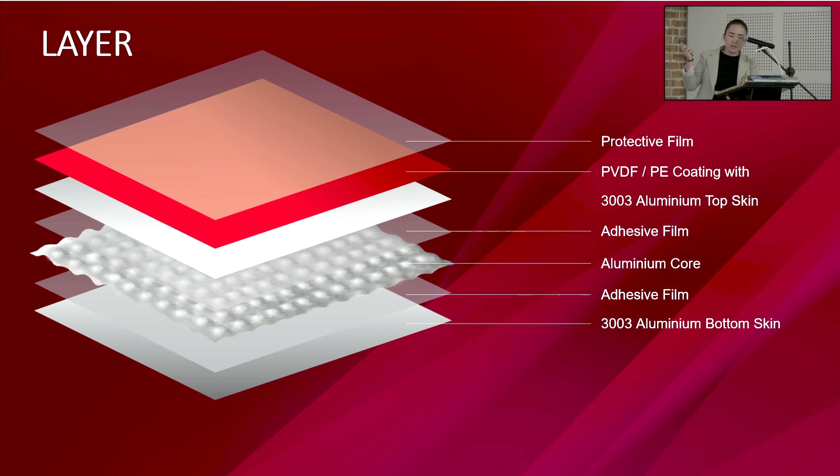Flatlite's total panel thickness is 4mm. Top and bottom aluminum thickness are both at 0.5mm. The finishing can either be PVDF, PE finishing, or powder coat. Panel width is fixed at 4 feet, and the standard length is 8 feet or 16 feet. Apart from the standard length, we can also go for customized length.

Why choose DML aluminum Flatlite? Since Flatlite is fully aluminum, it is non-combustible and fire-resistant material. The second advantage of Flatlite is lightweight - it reduces weight by 30% compared to aluminum composite panel or standard solid panel with equivalent rigidity, making installation quicker and easier.

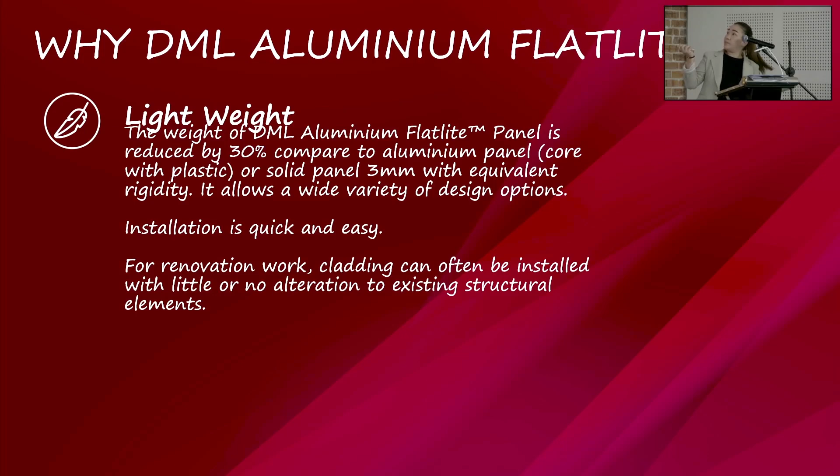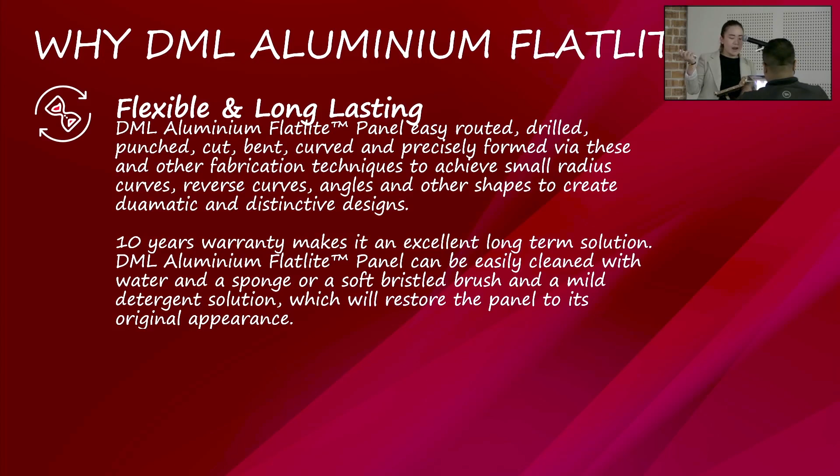Third, flatness and high strength. The Flatlite panel lamination process results in excellent flatness by eliminating small deterioration remaining in the thin aluminum, with durability and rigidity. Fourth, pure strength - Flatlite panel adopts new technology and reaches more critical technical indicators, with pure strength, quality, flatness, and weather resistance improved to the best situation. Fifth, flexible and long-lasting - Flatlite is easy to fabricate to achieve any distinctive design, and it's also easy for maintenance.

Last, easy to process and install. Since Flatlite is lightweight and flexible, it is unnecessary to add on a mass support system. In conclusion, the advantages of Flatlite are: lightweight and low static load, high property strength and good rigidity, sound insulation and heat insulation, waterproofing, UV resistance, recyclability, and high surface smoothness and flatness.

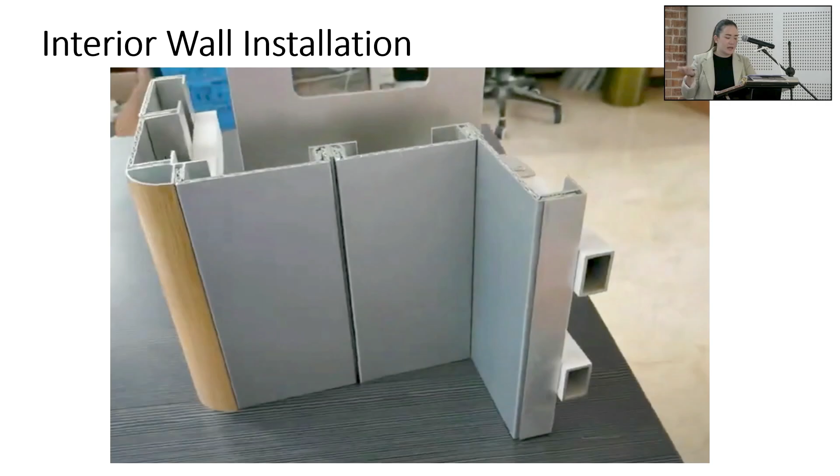This is one of our installation methods. Our aluminum product offers unrivaled flexibility, aesthetic, and safety assurance. We are not just a manufacturer - we are your partner in design and construction, committed to bringing your architectural vision to life while upholding the highest safety standards. We invite you to explore the limitless possibilities our product offers and to engage with us for design guidance and installation expertise. Thank you for your attention, and we look forward to collaborating with you on your future architecture endeavors. Thank you.

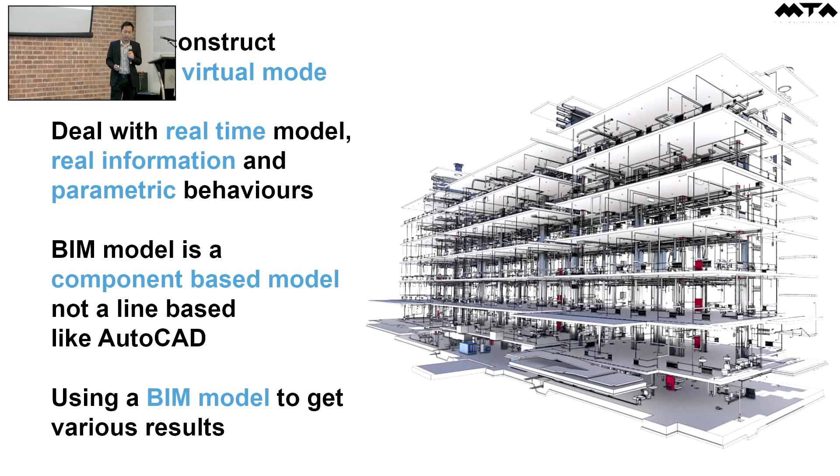It's not line-based like AutoCAD. We have some data inside the models, and we can use BIM models to get various results from concept to construction.

First of all, we need to understand the LOD, level of detail, level of development, where we have LOD 100 until LOD 600. We must understand this first before proceeding into BIM models later.

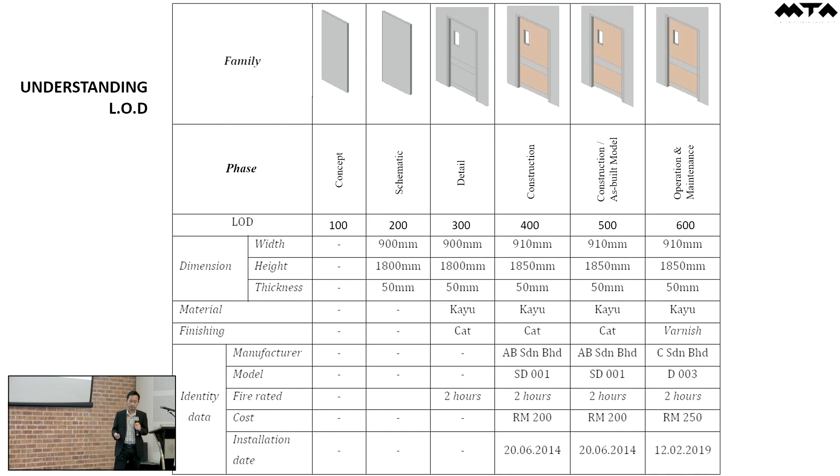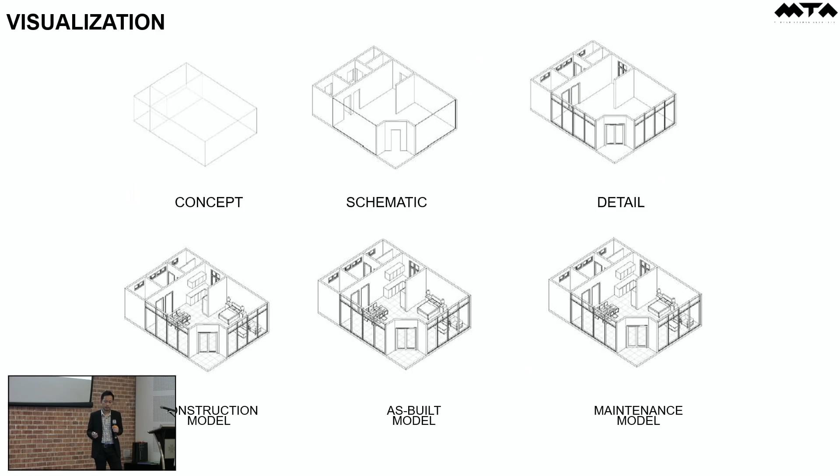I will start with visualization. Before we embark into BIM, we must understand this diagram, which is the concept. We start with blank massing, schematic, then proceed to details, detail into construction models with data, as-built model, and into a maintenance model with a lot of information and data inside the models.

Concept design stage - we can start with massing form from the models, and then we develop into schematic design, where we can get in the early stage of concept, so we can get the square area for initial costings.

In the early stage also, we can get samples of floor area we can get from the massing.

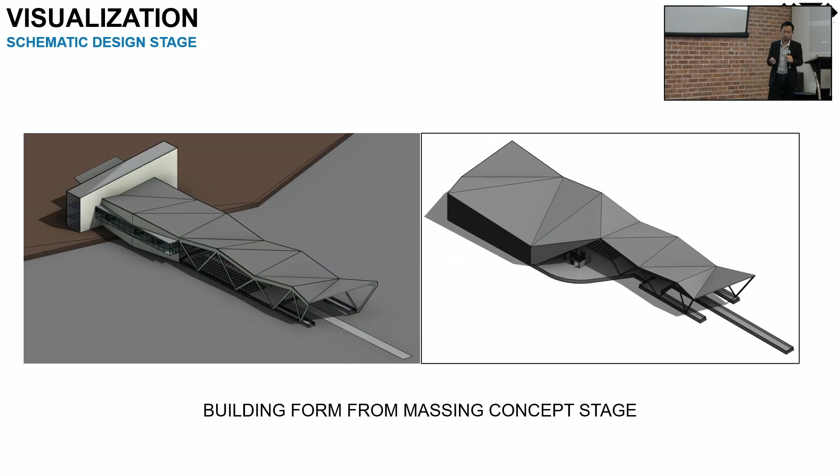So the model helps from the early stage until the later stage. The development of models goes from massing into schematic design, and then we combine architecture and other disciplines, and we can plug our initial schematic design into the real-time site.

Second thing is design changes. This BIM model has parametric design changes, where we update certain elements and they update in all views because we play with models. If we make changes in plan, it will update in other sections and elevations because we play with models. So we can manage changes in this parametric behavior, so nothing is missing out when we want to produce the drawings later on.

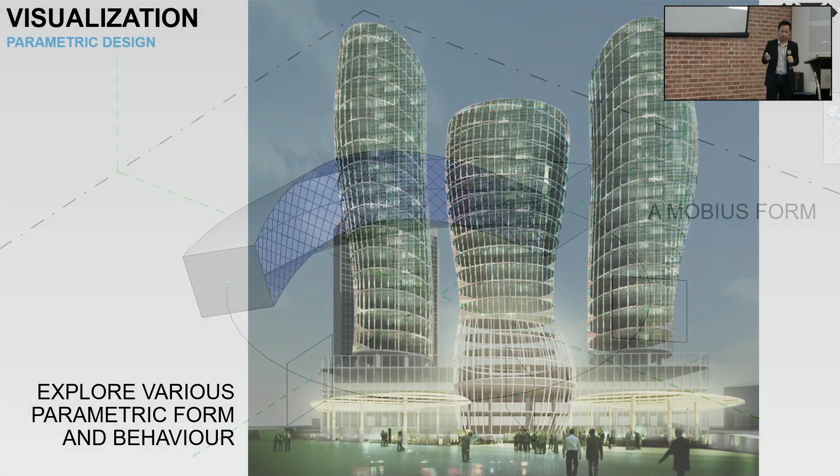So we can also go into parametric design. We'll talk more about this parametric design after this. It's possible to have parametric design in a BIM model. So it's not rigid, we can explore more using BIM software.

Another thing I will share is site modeling. We can use data from the survey plan to generate 3D site modeling from the survey plan. This next record model topic shows that BIM models can be used for record models of heritage buildings.

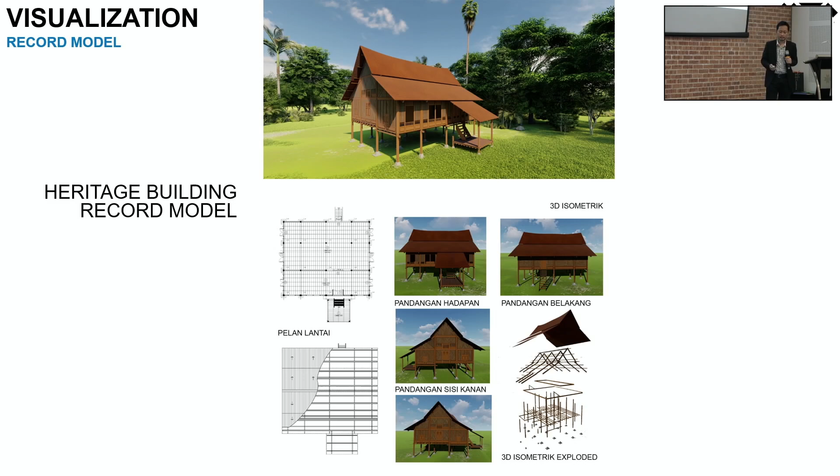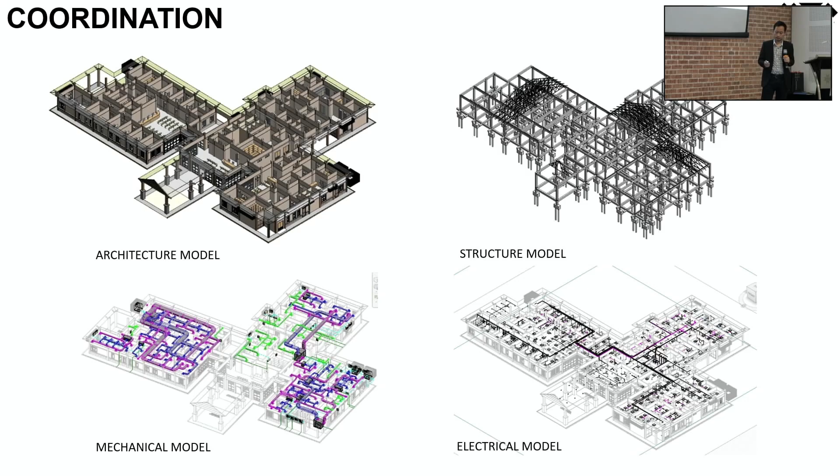Another picture of a coordinated BIM model. We can also have the internal perspective to see the environment.

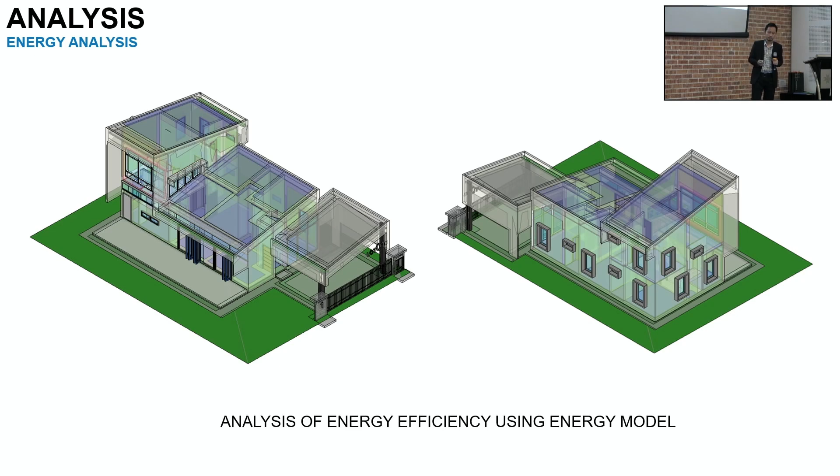Next is analysis. We can utilize the models for analysis. The first is energy analysis, for capturing energy efficiency. Then there's spatial analysis, such as for hospitals, where we can analyze separate aircon rooms or non-aircon rooms, and 24-hour or non-24-hour areas.

Before the hospital is constructed, we design this spatial analysis first. This is more important: from the model, we can do documentation, which is the concept of 3D to 2D drawing production. As we know, the BIM model is full of components, and these components have data, dimensions, views, and properties that we can see. This is some of the model data.

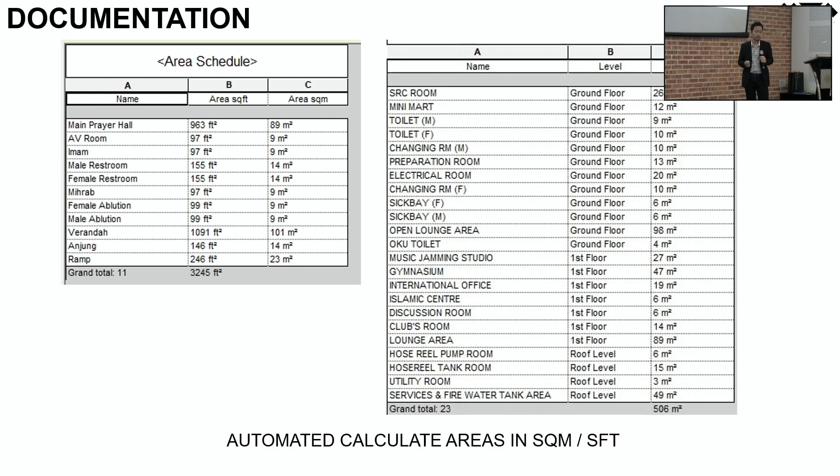The second point is we can calculate the total area automatically, whether in square meters or square feet. We can also automatically calculate the total number of doors, windows, or other building elements. Because we are working with components, we get these totals without missing out any of them.

For 2D symbols, this is used in production of construction drawings and submission drawings. We can also produce these symbols and use them in drawing production. So for 2D production, from the BIM model we can get submission drawings, tender drawings, and construction drawings too—we don't revert to AutoCAD, but utilize the models to get the drawings coming out.

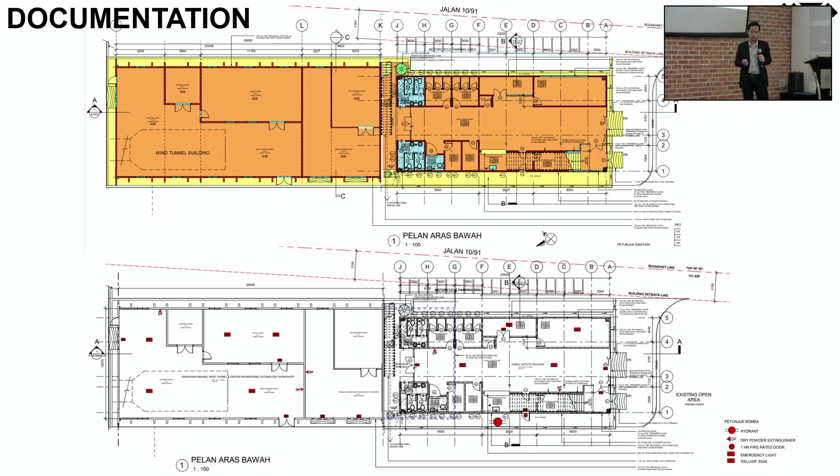These are samples of drawings. The line work is very good because this is auto-set in the software. This is an example of submission and BOMBA drawings, as well as room data, room schedules with the grand total of area.

We can also have 3D and 2D documentation like this, showing all the sprinklers or BOMBA equipment inside the models. So to successfully produce 2D drawing documentation, we play with views and filters—mostly filters—to get the division of submission drawings, tender drawings, and construction drawings.

This is a sample combining all disciplines, from which we later produce the 2D drawings for tender and construction. We can see on the ground floor plan all the equipment.

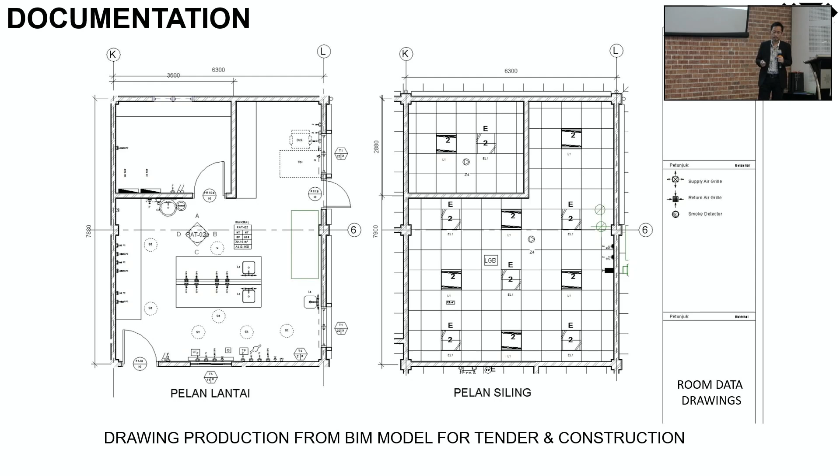It's combined with switches, sockets, and the reflected ceiling data, the reflected ceiling where we can see the position of lighting with M&E equipment also.

This is for elevations we produce from the models. If we equip the equipment, we can see it already placed inside the section and elevation.

Another sample. This one can be used for ID works.

Okay, costing. How can we help in costing? In our team, we have QS who can read BIM software, so they can get these materials for quantity from the schedule. You can see the schedule of floor finish there, and then we can get the grand total area, and then the quantity. So it helps a lot in costing for taking off.

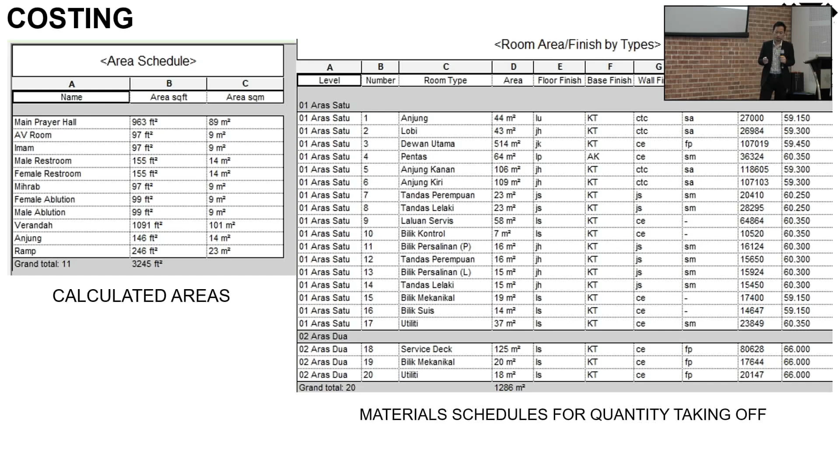This is construction 5D. This one is interesting because it involves a lot of technologies here.

First of all, BIM software for the BIM model can be used for simulation phasing, where we can see the construction simulation, whether it's correct or not, how to do it first, and then what to do next.

Another thing is we use simulation using the work program. We combine the BIM model with CPM, and then we can simulate the timing, the progress according to the CPM that we combine together in BIM software.

This one is internal installation of M&E. We combine it with the CPM program, and then we simulate.

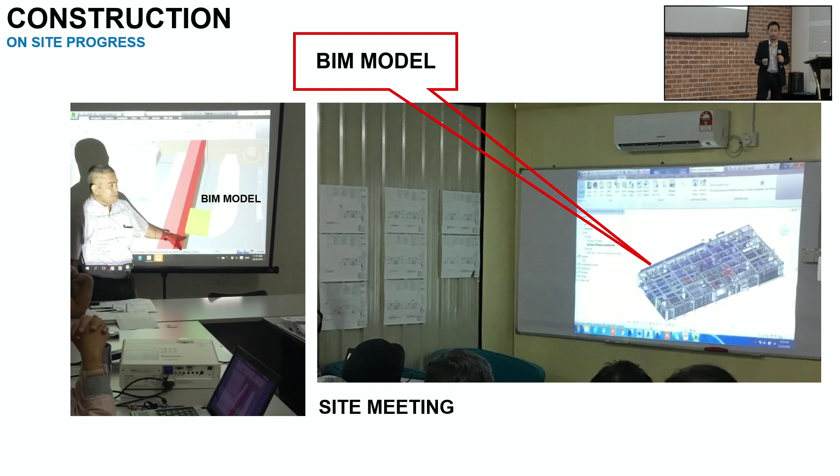This one is an on-site meeting right now. If we have a BIM model, we use it for coordination or decision making on site.

We also use this tab to see the BIM model versus the real site. We have this BIM model, and then we can see the actual site versus the BIM model on the digital view.

Another thing is we also use a 3D scanner. We can see the discrepancies between the model and actual on site, the tolerance, how they install, and then how we can make an adjustment or improve on the site condition later.

This one is a real-time 3D scan data environment. We use point clouds, and then we can get the measurements of the environment on the existing building in construction. With this data, we can decide how to improve later on the construction site, improving the BIM model, site inspection and decision making.

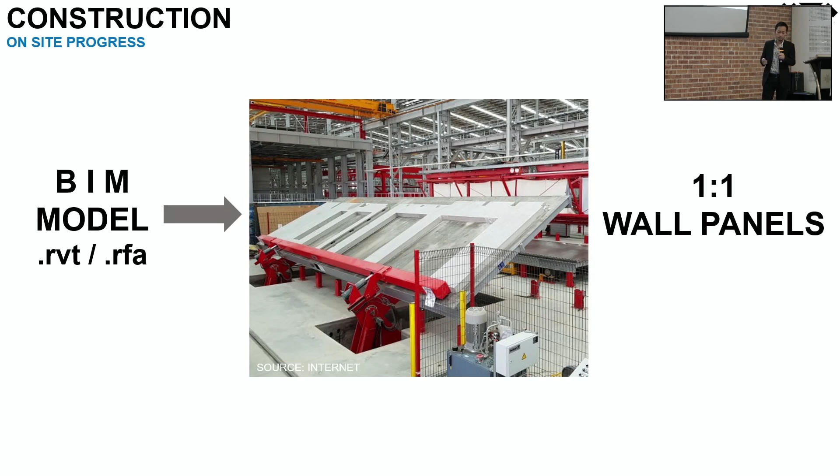This one, if we have models and components, we can manufacture and fabricate a one-to-one scale wall panel like this, in a factory. It is accurate according to the models, and this improves accuracy.

Another thing is we can use this BIM for site logistics and planning for contractors, how they can locate the crane, site logistics, materials, and so on.

So that's all from our slide. Let's build better buildings with BIM, using BIM. Okay, so thank you.

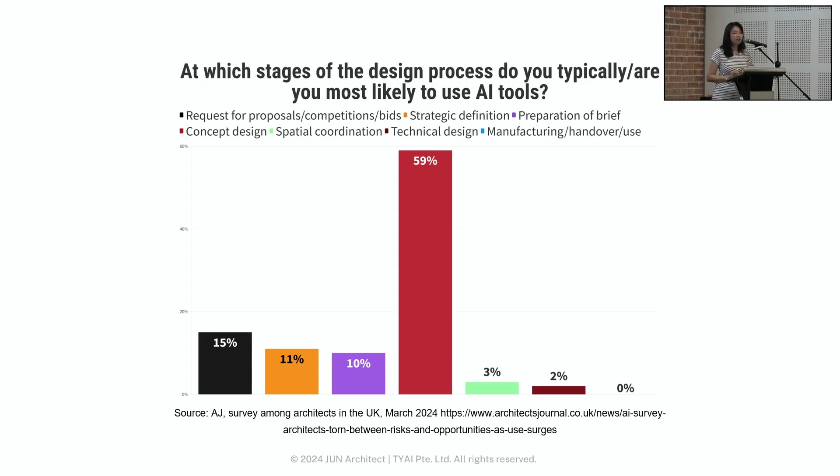That's why I'm here to urge everyone of us as architects to start today and don't put it aside, because AI is already at your fingertips. Just download it and start to talk.

So, how will generative AI benefit architects? Let's look at some of the facts. Fact number one, Gen AI, as I'll call it in short, is projected to add 2.6 to 4.4 trillion annually to the global economy.

For design, the Heydar Aliyev Center in Baku, designed by Zaha Hadid, showcases generative design by creating a curvy, functional building that adapts to the property's topography. So, they are using Gen AI.

Development: Daiwa House Industry in Japan uses generative design to create high-density urban housing in small plots, optimizing living spaces efficiently.

Documentation: Autodesk Project Refinery uses generative design to automatically generate construction documents, reducing time spent on drafting by 80%. So do we need more draftsmen, or do we need more AI?

Dissemination: Foster and Partners actively embraces generative AI tools like DALL-E and Midjourney to generate new design ideas and inspire clients with innovative concepts. You see the importance of DALL-E and Midjourney here.

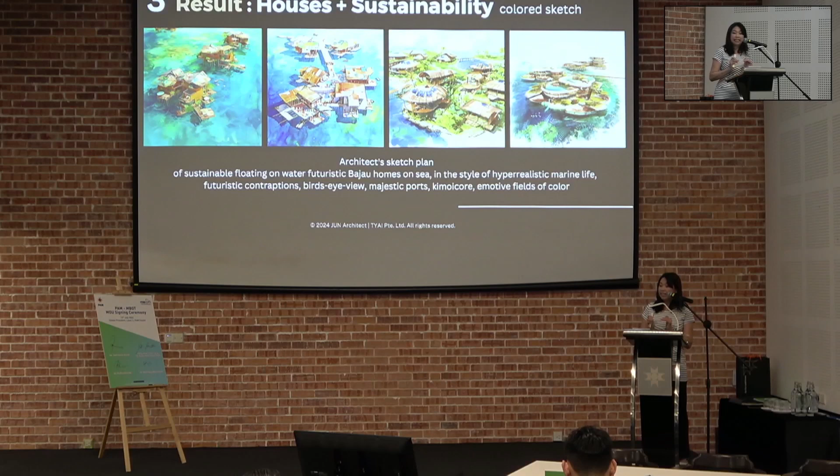If you add in more elements, it will start to add something more detailed - this is the power of generative AI. So next, if I add farming, community activities, this is what it will anticipate. In this project, I did like hundreds. After that, a group of educators, we all sat down and talked in a meeting, and chose what's actually the best for the anticipation.

Now I'm going to introduce to you what Midjourney is. Midjourney is, as I've said, a powerful AI tool to generate images. You can use it to visualize design ideas quickly and efficiently.

One of Midjourney's strengths for design thinking is called text prompting, using descriptions only. You can just type something in, but you need to be specific. You can create design concepts with specific details. For example, an interior view of an architectural pavilion with colorful timber panels, whatever you want to say. You need to describe it specifically, how you want to see it, including the place, reference material, elements, and wide angle shot.

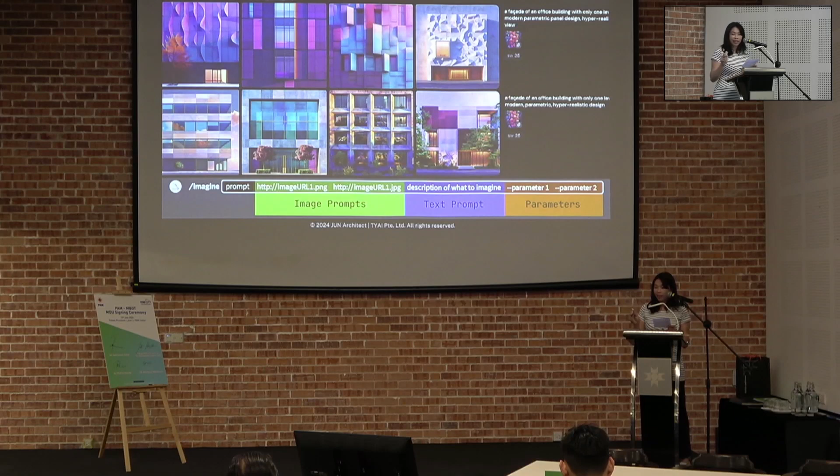Form finder: you can also use multiple images blended together with certain degrees of chaos or weirdness, whatever you want, because if you know Midjourney there are a lot of commands you can play with to find the exact exterior frontage. This is an example of how I used that to find a facade design.

Beyond Midjourney, I'm going to introduce you to Leonardo AI. This is another diffusion model that excels at refining initial details. What I did here is provide a sketch, a hand-drawn sketch, use text prompts, upload the sketch, and add something like 'modern office building tower.'

I use the right model. Below that, I indicate the Leonardo Diffusion XL model, image-to-image technique, parameters, dynamic preset, something like that. So it comes out with something very interesting, a raw model. But if you add another prompt, let's say 'Art Nouveau facade,' you get something incredible.

What about revamping existing buildings? If you have an old building, the original image, I took it from an existing building, I use another AI platform. There are two here: one is called PromeAI, the other is called Krea.

This feature is called real-time regeneration. You input the original image, and I use some techniques to extract the lines out, the line sketching, taking away the colors first, and then start to regenerate. But you need to input a building purpose, meaning what kind of usage this building has. You start to prompt: say this is a college, this is a hospital, what do you want to change the existing building into, and then start to regenerate again.

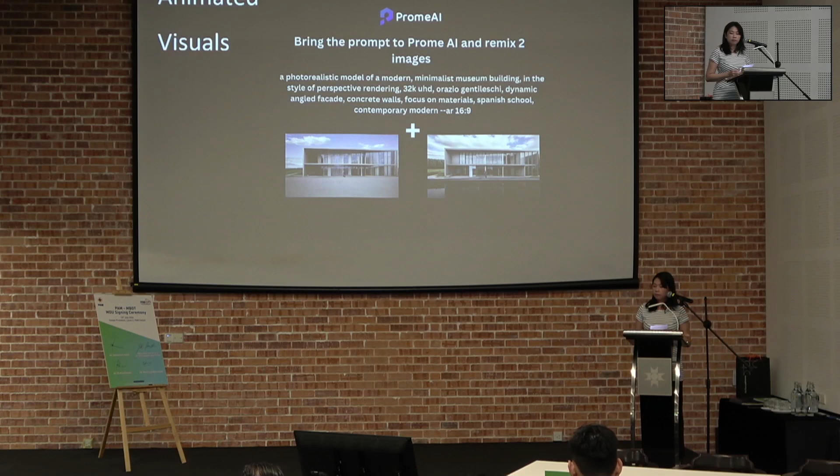Gen AI toolkits: today I have three to introduce to you. The first one, if your architect firm or your team doesn't want to go for online platforms, think about the stable diffusion model. This is the future.

Why? You can build your own model, and it's offline. You don't have to share your content online with other people if you're afraid of that. If your clients have privacy issues and don't want things exposed, and you're afraid of security threats, you can try to train your own custom image generation workflow called stable diffusion, with greater creative control.

This deep learning model is also well known as automatic 1111 or ComfyUI. So what do you do with this Stable Diffusion model? I call it SD. In short, SD produces highly detailed images based on text descriptions. It has more customization and control, and you can also fine-tune the generation process through adjustable parameters.

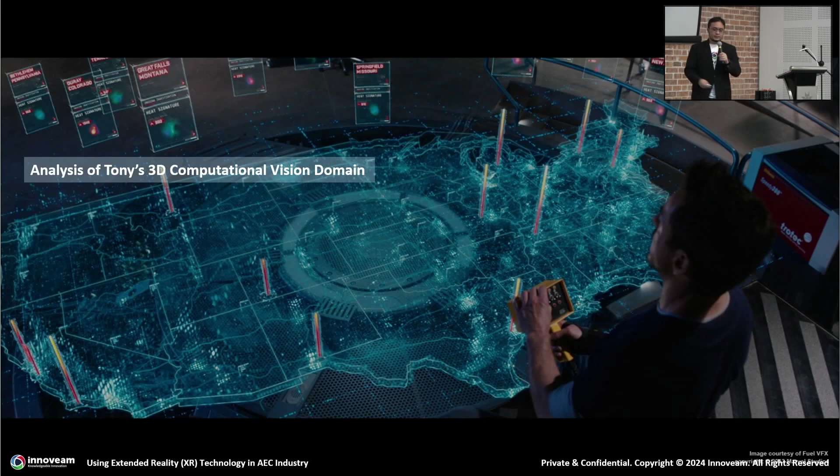What we can see from here is that, first of all, he's got awesome visuals, highly interactive. He can get data from anywhere. Visuals showing up, graphs and so on and so forth. It's contextualized 2D and 3D data. You've got the cards, you've got the information there, you've got the graphs, you've got the maps as a 3D map, and he uses this to make a decision on what to do next.

He was looking at all the different data sets and trying to decide what to do next, and ultimately he's got Jarvis there. Architect Jun just now showed about AI—Jarvis is a movie example of how Jarvis assists and co-creates with Tony to come up with things.

Now, what we observed just now, but what can we learn? The first thing is that everything comes down to data. You need to have data. For architects, for firms, for construction companies, data is key—about your BOQs and all those things, your schedules, all this information. So data from structured and unstructured sources has to be contextualized and analyzed to provide the right insights.

The next thing we can see and learn from Tony is that technology has to be integrated. You've got visual technology, you've got AI, you've got 3D data sets, you've got all these sensors, cloud computing and so on. All these technologies have to be co-working together and integrated together to create the best solution for you.

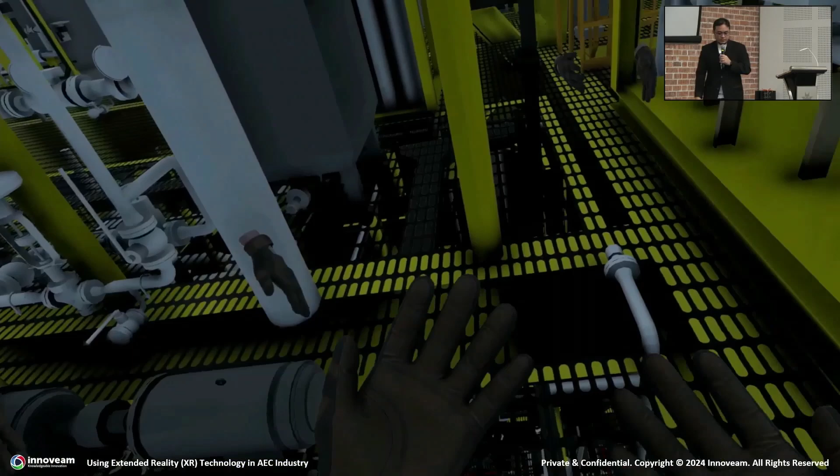So this is some samples of VR that we are doing with Petronas. We are building accurate representations of virtual worlds of their oil and gas platforms. And in this scenario, you can see 3 people collaborating and conducting site visits together on a virtual platform. And they are joining from various locations. So they are not necessarily in the same place, but one is in another office, one was in KLCC, Bangi, and also in my office in KL.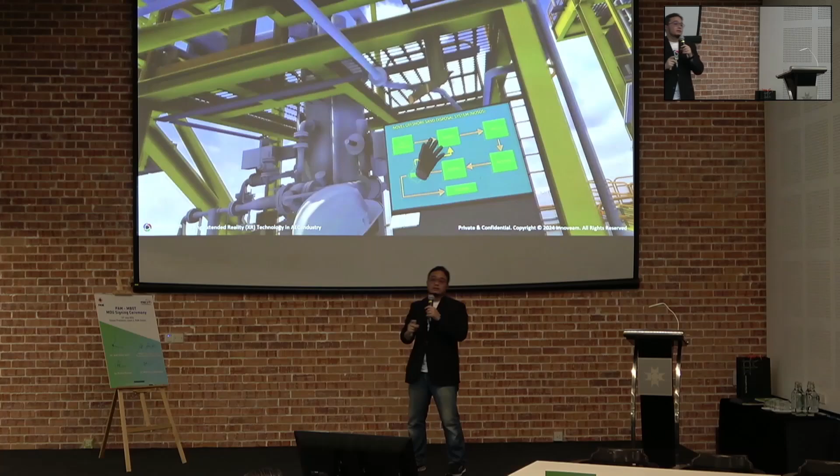So you can see one guy there, another guy on the right-hand side, and another guy taking the video. Okay, so there's 3 people in here. And this collaborative XR project was done in 2019, so this is 5 years ago. And we were already looking at collaborating in the so-called metaverse even before Facebook changed their name to Meta. Okay, so we were already looking at pushing the boundaries on using collaborative XR for design reviews, and so on and so forth.

Another video for VR, if it's playing. Is it playing? Yeah, this is done for another facility. Again, multiple people joining in, they're conducting training on how to start up a plant. But in order to start up the plant, we need to understand the facility first, right? So we have this lobby-ish area where we can have all these 3D models in.

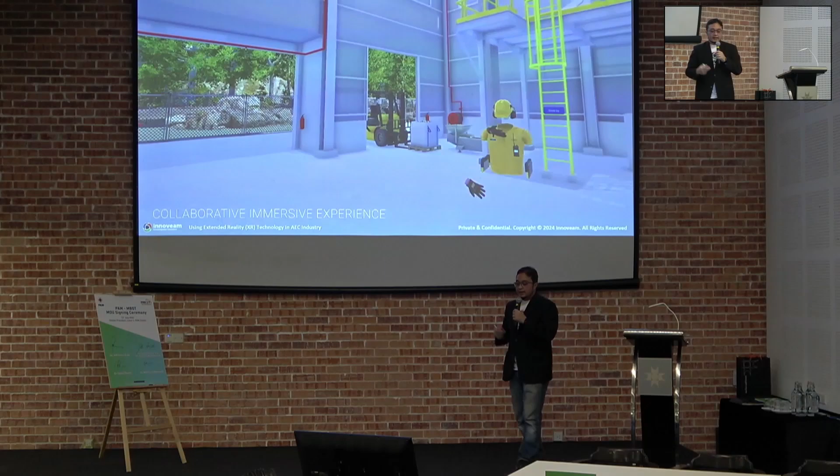And now we are located on site. And we have training procedures in front of us, and we have chat, and we have a control room complete with CCTV. So you can actually see on the left-hand side a CCTV of the virtual plant. We are mimicking real-life conditions here, where in reality there is a control room monitoring people in the actual site.

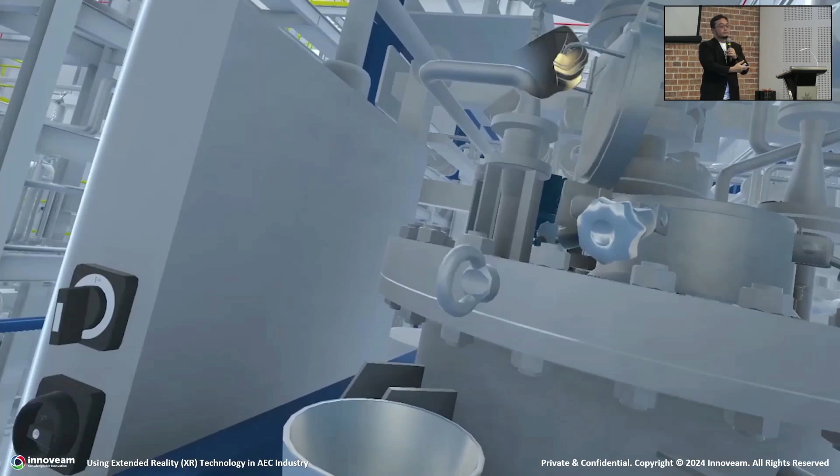And this is what we replicate in this metaverse that we're building for Petronas. You got chats, you got the radio controllers. All these are fully interactive, and this is a digital twin based on a 3D model, complete with behavioral analytics data that I mentioned just now — what happens when we do things, what happens when we don't do things, and so on.

Okay, so I'm going to continue. Talk about AR, augmented reality. So just now, when you wear the VR headsets, you're fully immersed in the virtual environment. For AR, this is an augmented reality headset. So I'm in my office, and you see the 3D models of the oil and gas facility. Similar to Tony Stark — I said Tony Stark was my inspiration. We are literally creating a similar environment like Tony Stark.

Multiple data sets can come in, and then you have the dashboards at the back. These are all real-time data. It's highly interactive — we interact with the 3D models. So now you can see it's oil and gas facilities, but it's as easy as that.

We can deploy using BIM models. You talk about BIM...

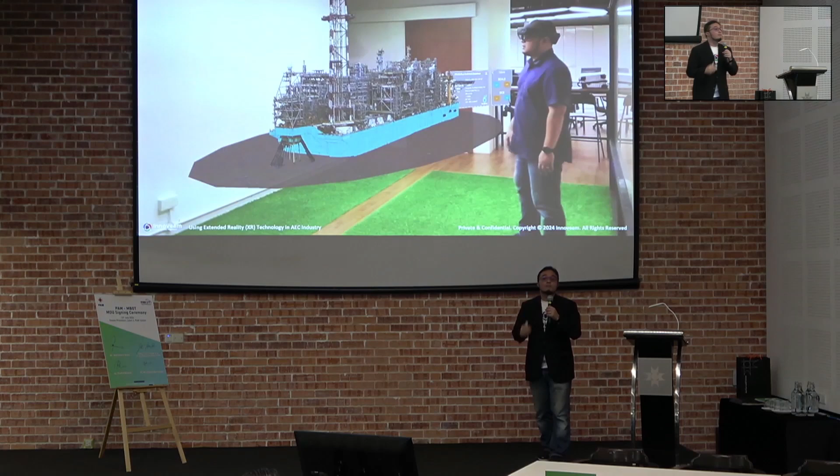Okay, so that's augmented reality. Another example — you can see the complexity of the data that we visualize. This is using photogrammetry technology, capturing a real-life facility, and I'm building this in this collaborative environment, this collaborative metaverse, with real-time data coming in as well.

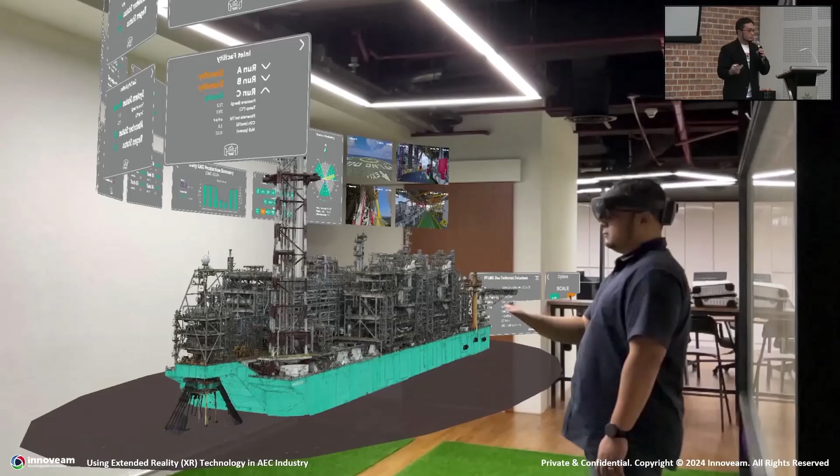So these are the things that we are already doing with Petronas, and they have a huge appetite for using this technology to visualize 3D data sets, incorporate data, build 3D digital twins, and make fast decisions together. They're collaborating from anywhere in the world, actually — you have that capability as well.

Okay, so I'm just going to continue. Talk about 3D digital twins. From our point of view, 3D digital twins are computational models. So now, some of the sharings you have with BIM, you can do all these analyses. If we start to integrate with data, we can have computational models. We can do energy analysis, spatial analysis, indoor air quality, HVAC design, and so on and so forth. So they become computational models.

And it's being fed with real-time data, or real data, design data, engineering, all your codes and standards and so on, to ensure compliance and so on and so forth. And I'm going to give you an example for the oil and gas industry. Consider this — there's an oil platform, and you've got loads and loads of systems on this oil platform: separation systems, compression systems, Christmas trees, water treatment, and so on and so forth.

So many systems there. Now, each of these systems will give real-time data. Each of it will have IoT sensors, real-time sensors, CCTV sensors, and so on. And you have multiple other data sources as well — engineering data sources, operational data sources, daily reports, daily operations. So data can be real-time, can be automated, or on demand as well. On demand means whenever I need something, I send someone, or a robot, or a drone to go and pick up that data.

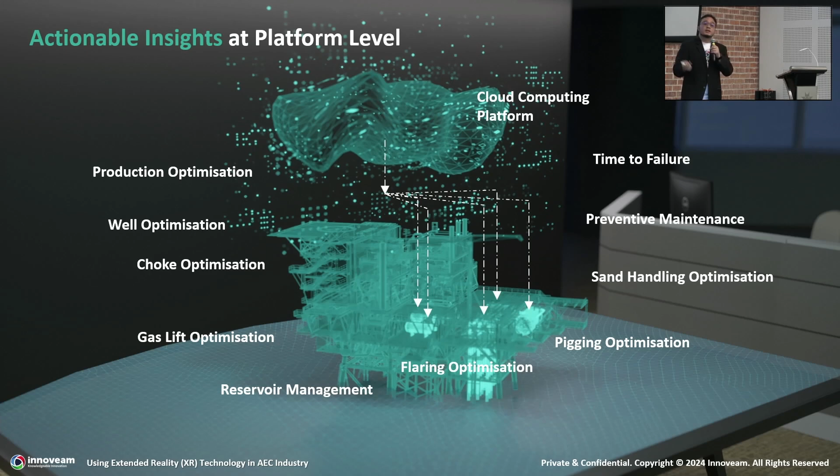AI, machine learning — we've been talking about that this morning as well. How you can automate things, how you can make decisions faster, and so on. But you also have on-demand analysis as well. And then you get all these insights to make decisions — how do you operate, how can you improve, optimize production, optimize choke, optimization of gas lift, and so on. These are all the various operations in the oil and gas industry, and it goes back to the facility, that individual facility we started to look at. This gives the engineers the ability to make decisions very quickly, and make the right decisions as well.

Now, going to BIM. So, you know, this is a place full of architects, so this is more relatable to you guys. Talking about BIM, from planning, from design, from building, and operating - these are the 4 project life cycles. I took this from the Autodesk website, it's not mine. But this one I developed - this project life cycle for BIM, which is actually applicable for multiple capital projects, not just BIM.

You've got robust data-driven design optimization - this is the design side. Your conceptual engineering, your front-end engineering design, construction planning, scheduling, quantity takeoff, costing and so on. So that's the design engineering side.

Now for architects or for the AEC industry, there are loads and loads of data, from GIS, water behavior, water tables, blah blah blah and so on and so forth. So many data sets are there. So you need to have a way to incorporate all these things in your design, in your construction planning, and so on and so forth.

And then it goes to EPCC. If you go to design, this is where the LOD 100, 200, 300 comes in, designing all these things. Then you go to EPCC, which is more about managing construction processes in the most efficient way. You have your EPCC contractor appointments based on 3D data - you can break down the different packages for your capital projects and so on.

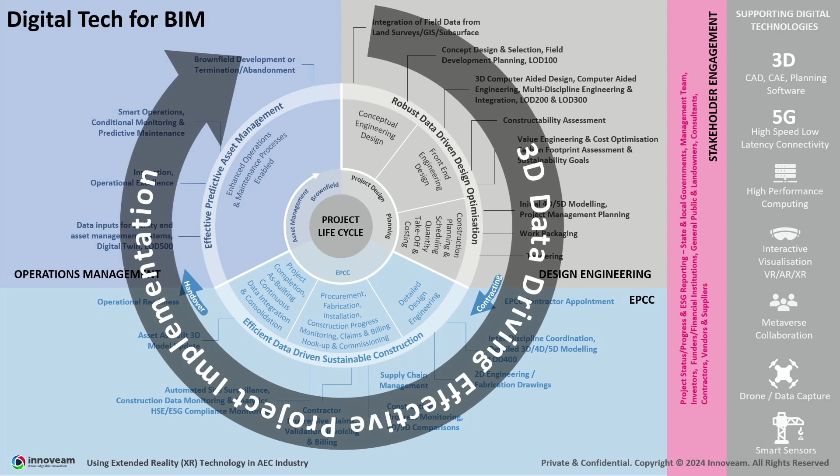So what you can also see on the right-hand side are the supporting digital technologies that can be used for digitally transforming your processes in AEC construction. All these 3D planning software, internet connectivity, 5G, cloud high-performance computing, VR, AR, and XR technologies, collaboration in the metaverse, drone or data capture, as well as smart sensors - these are the technologies that can assist in transforming your construction processes digitally.

Now I'm sharing some examples of projects, design reviews that we are doing in this industrial metaverse that we're building for Petronas. The first one - we reduced the volume a bit. So this is an MRT design.

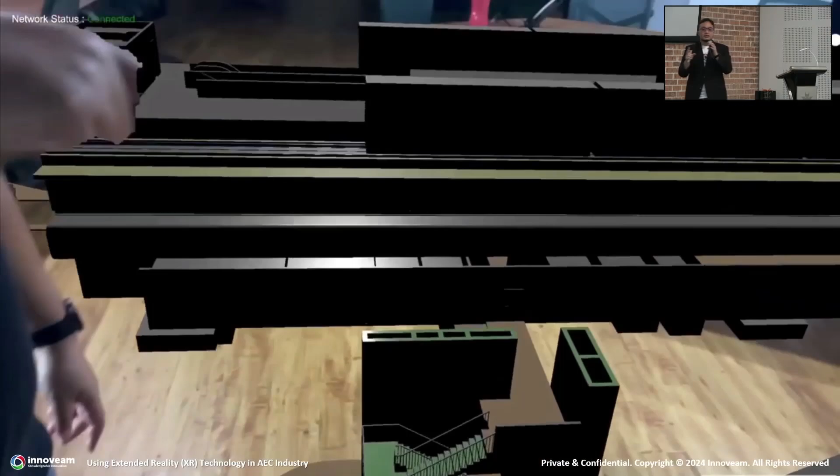I am using the HoloLens 2 devices to collaboratively review these designs with my colleague in a spatial computing environment. I see 3D models not as 3D models on the screen, but 3D models in the space in front of me. So immediately this brings the third dimension into the architect's or designer's power, in their control. You see the depth perception - you see it as if it's a 3D printed object in front of you. So this is how we are using spatial computing and XR technology to do design reviews.

And we can easily link all the metadata, all the design data in there as well. The design is not mine - I was provided this to create a proof of concept. So I'm just visualizing it in this spatial environment.

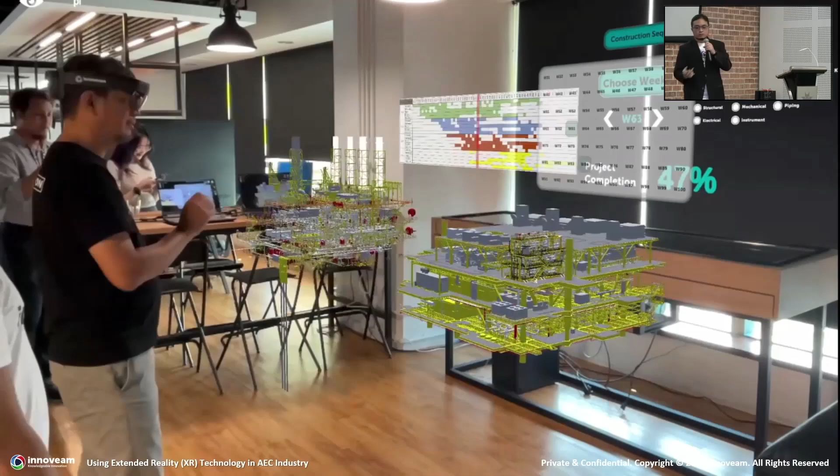And again, it's a collaborative environment. I'm not seeing this by myself, I'm seeing this together with my team. So it becomes a very powerful tool to make decisions in terms of, is this the right design, is this the right schedule, and so on.

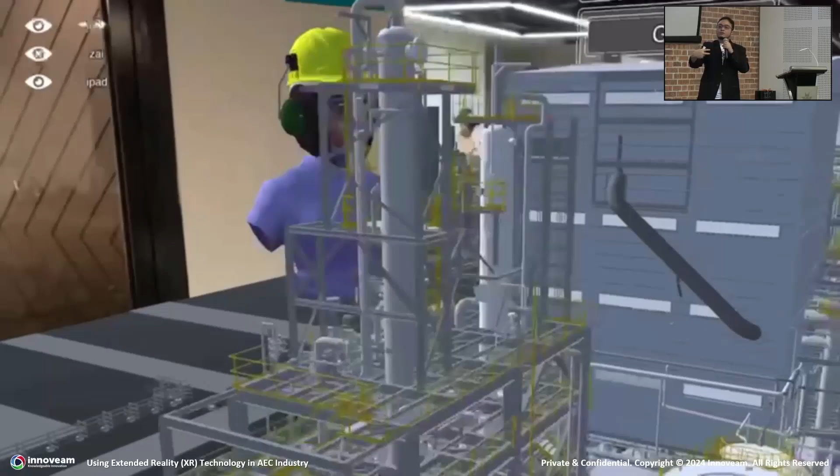And now we are also doing design reviews, this is an actual project. I'm showcasing remote collaboration, meaning if you're not there, somewhere else, you can also join in the discussion, represented by an avatar. And you can bring your CAD models in there, so from somewhere else you join the design review and see these 3D data sets in front of you.

And then you can bring up your drawings, collaborate there, mark up, discuss, all the voice chats come in as well. And you can also make it real scale, so now I'm transported to that place. You can immediately see measurements and all these spatial requirements.

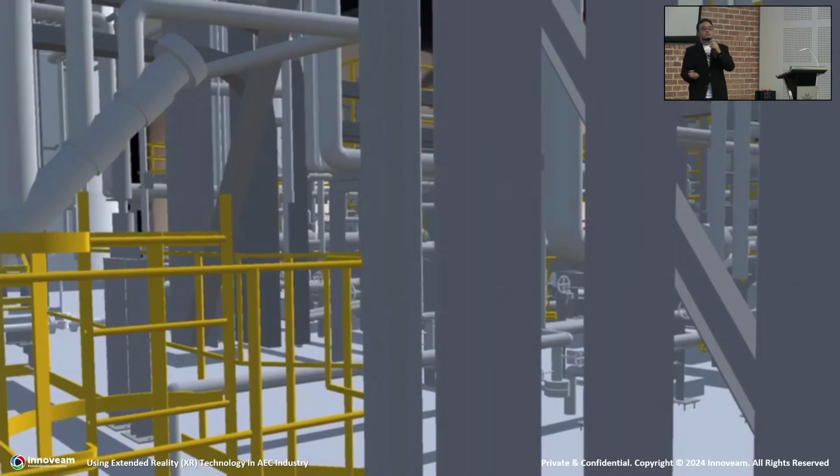And this is a combination of virtual reality and augmented reality technology, a cross XR platform that we have developed for visualizing all this 3D data. So now they are back at the original place, and you can see the 3D models again.

So what I'm sharing with you today is that XR technology is just a visualization tool to see all your 3D data sets. But to operationalize it, to create value for your company, the content you're visualizing would be the 3D digital twins of those facilities, of your design. That's where the data comes in, that's where analysis comes in, that's where simulation comes in. And then we bring it and extend it to these XR environments for collaboration. So this is how, right now, we are using this technology for Petronas.

I'm very proud to have our national oil company having this appetite to come up with new ways of working, preparing for the future workforce as well. I'm hoping this technology can also be implemented outside of oil and gas. Now we are trying to diversify to smart cities, to the construction industry. I'm hoping that by seeing my presentation, you get some ideas on how this technology can be utilized for your company, and also to create value for your clients.

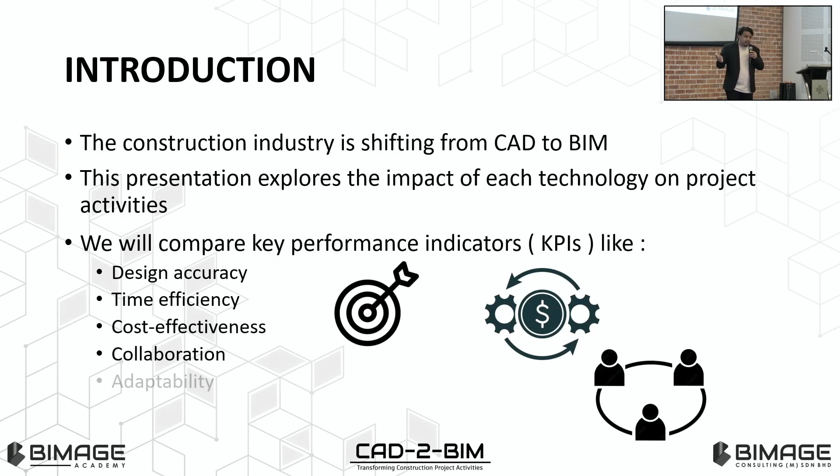So what I'm going to give a talk about today is CAD to BIM, okay? CAD to BIM is, how can I say, a movement - basically our movement with Autodesk - to ensure we give exposure to the CAD user on how to implement BIM within the company. So basically, the construction industry is shifting from CAD to BIM right now. Don't be left out, or you'll be left out, right? This presentation explores each and every project activity. The key performance indicators, the KPIs, that I'll cover today are design accuracy, time efficiency, cost effectiveness, collaboration, and adaptability.

So basically, are you familiar with these things? For sure, yes - it's already monopolized our industry for around 35 years. These things are called technical drawings, or the 2D drawings that we produce. So what software do we use to make this? Basically, the software we use is AutoCAD - this is one of it, we have a lot of CAD software. This is how it looks, already familiar, right? So basically, what is CAD? You guys already know what it is - the computer aided design software.

So it is used for 2D drafting, and also has the capability to do 3D modeling, but it's kind of limited. The key features are precision and control, automation and documentation, and customization.

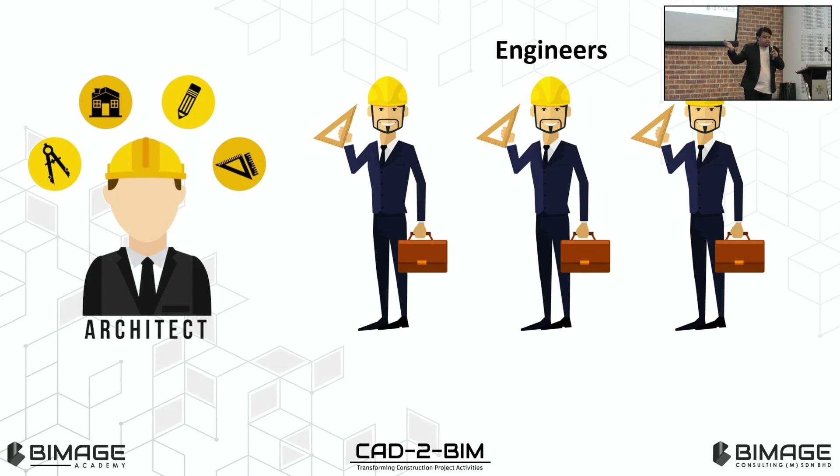So how did this CAD process affect coordination? This is our current coordination for those who haven't implemented BIM yet. Basically we have ourselves, the architects, and the construction players involved with the CAD process. We have three guys - the engineers. What kind of engineers are they? We have the basic ones, the most common: structural, mechanical, and electrical.

So how does the coordination comply? The architects finish the drawings and then pass them to the others. How about the next one? The engineers finish up their drawings, and then it will be something like this - it may look like haywire.

What's the effect of this? Maybe for sure something like this will happen in your construction later on. I'm not trying to say anything bad, I got this from the internet, but these are the results - it's kind of bad.

So I will show you how this CAD process basically works. This is a video, so try to digest it a bit.

From the first beginning, be on the same page at every stage. Where's Paul?

Okay, what do you guys get from that haywire? Now you see, right? In this video, the first point is how they communicate with each other, and how information gets from the beginning to the end. It's like a queue from the beginning - tell the first word, who knows what the last person gets? So this is the result. Is there any solution for this?

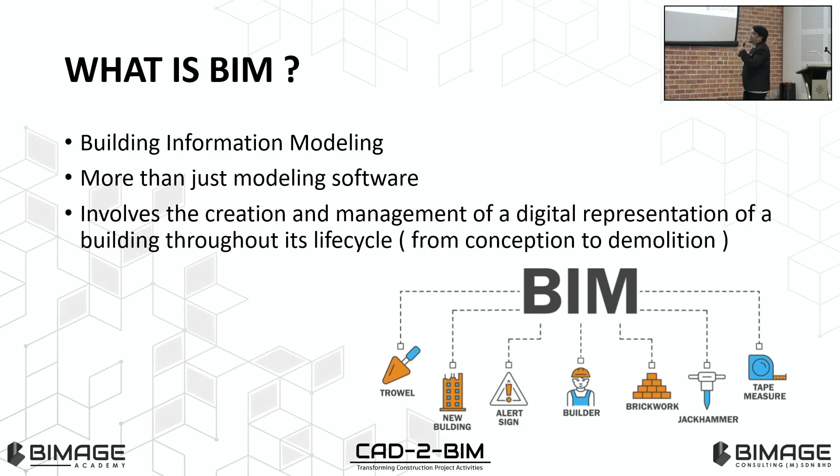Okay, I'm quite excited, so it's kind of hard to breathe now. It involves creation and management. So the key features for BIM are 3D modeling with data, and collaboration between all of those construction players - like the video we just saw. Now with BIM, everyone is on the same line, the same information.

Life cycle management - already explained by Mirzam just now - on how we begin from the conceptual stage until the end, to demolition and reuse. And for simulation and visualization, 4D and 5D. 4D meaning for the CPM, the work program, and 5D means for cost estimation.

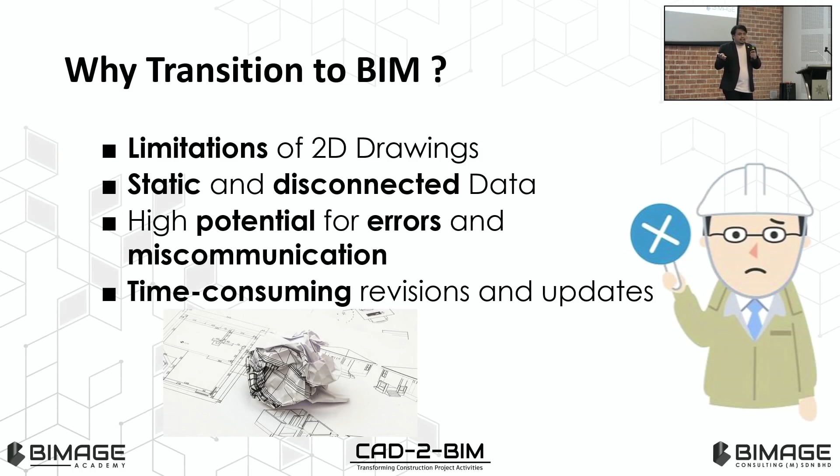So why do we need to transition to BIM? We have very limited limitations with 2D drawings - it's very static and disconnected data, with high potential for errors and miscommunications. Time consumption is also quite affected. I will show you the results at the end.

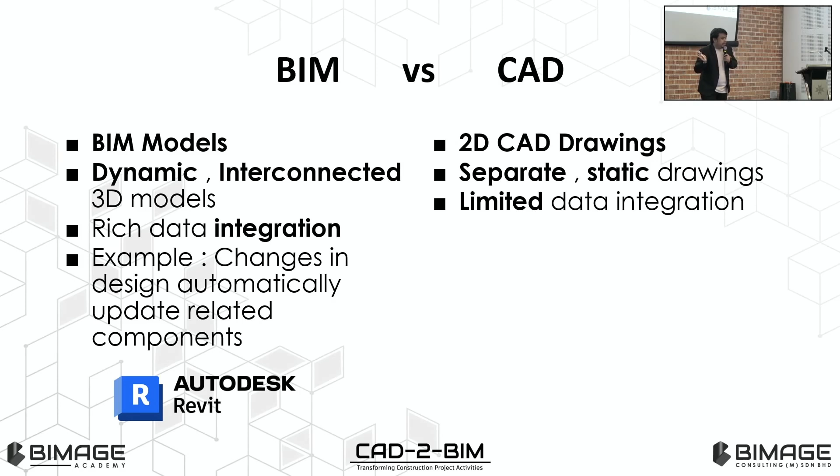I just showed you about CAD. So this is the main purpose I want to show you: the BIM experiment collaboration that we have done with UMP, University Malaysia Pahang. The objective of this project, basically, is to compare the productivity between the BIM and CAD process workflows, how it is delivered until the end.

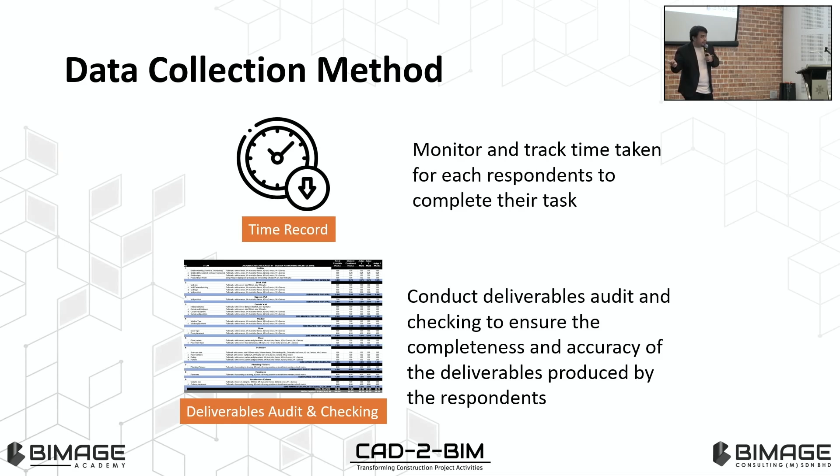So this is the methodology of the project. We begin at the pre-experiment, data collection, and also data analysis at the end. How did we collect the data? We monitor and track time for those guys, and we conduct the deliverable audit, checking and also produced by the respondent. Who is the respondent we take?

So we take 5 CAD users practicing within architecture firms, basically with 3 to 9 years of working experience—quite experienced guys in CAD. And then we take the Revit users or the BIM modelers, 5 of them, practicing in BIM consultancy, like 3 to 7 years in construction projects, and another 5 in quantity surveying, around 5 to 11 years of working experience.

So these respondents are given tasks. These are the tasks that we give to them, from case 1 until case 10. So for case one, we can see here the results. This is an actual experiment, not my mind made up.

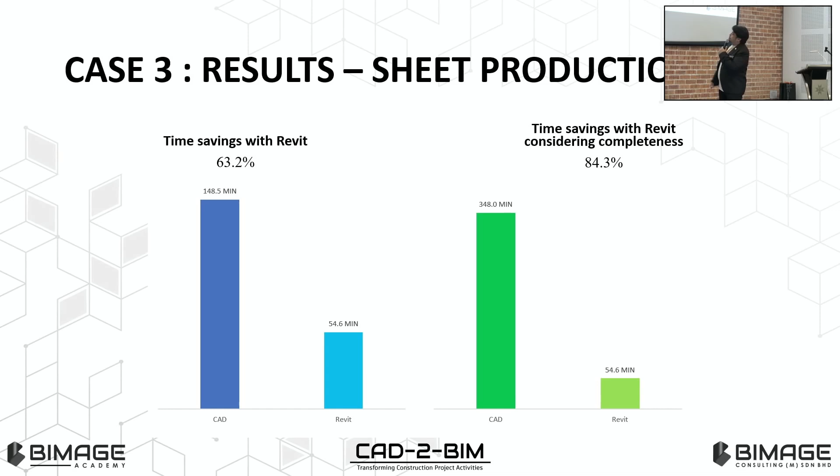So, time saving with Revit—we can see why, when we use Revit compared to CAD, it takes a lot less time, this difference. This is for architecture, this is for the structure, and this is for sheet production, how you make the title block, how you make the sheets. More than 50%, like 90% time saving there.

And also for corrective authoring, like the redos and so on—yep, also takes a short time to get it done.

And also for case 5, the quantification. Now this is where we save time for the QS. If you consume around 200 minutes compared to, say, 1,000 minutes using CAD—but with BIM, maybe 2 or 3 clicks, 10 minutes only, you can finish everything for the quantification based on the completeness of your BIM model. Or the cost estimation also, the takeoff.

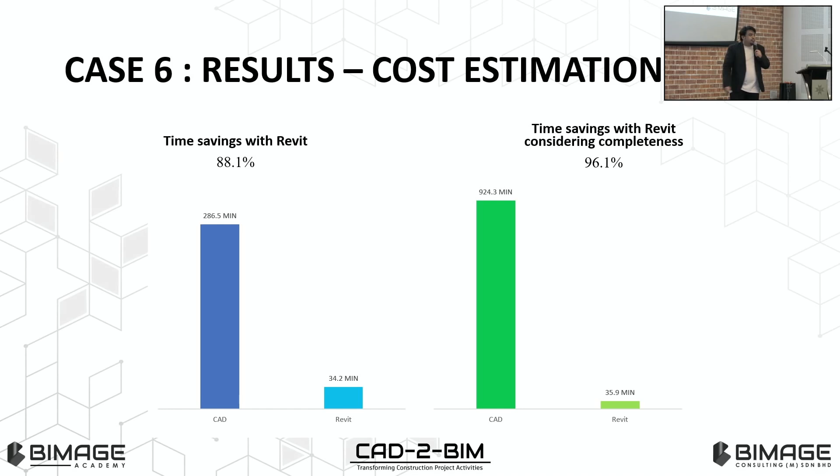No need to wait around one week to produce the BQ or SOA. For the CAD process, we need to do it manually, counting one by one. Now this is the result—no need to do it one by one from A to Z, because when you start with BIM, you're already at the end. It's just a few clicks and you can get the numbers.

Also for the drawing schedule, BIM is still winning. For clash analysis, like we do for the coordination meeting among the disciplines, among the consultants—with this clash analysis, yes, we have saved time for them. If time is saved, budget is also saved. We can see here, BIM is still winning. I still criticize CAD—BIM is still okay.

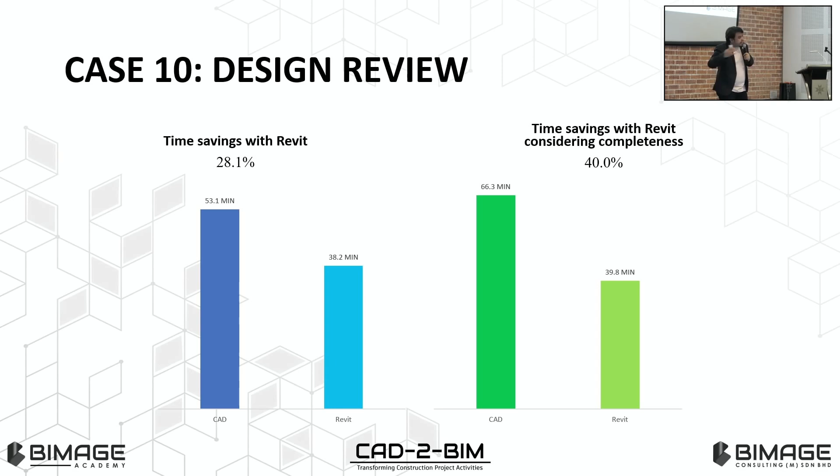So time saving with Revit for the design review—there's still a difference there. BIM is still winning.

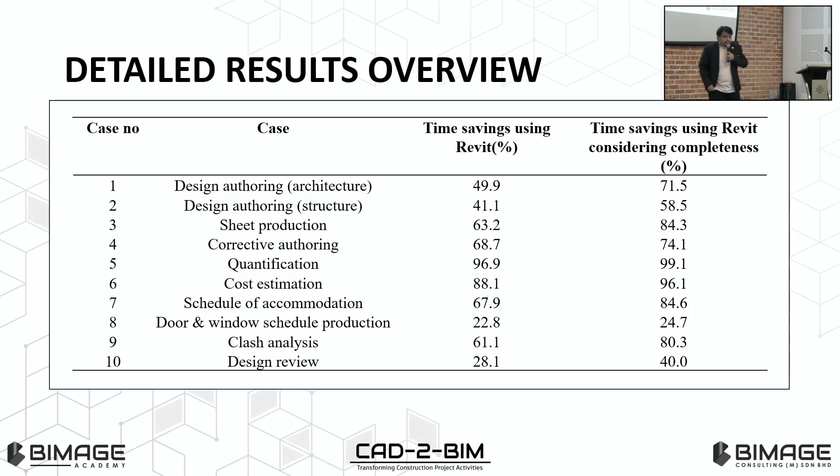At the end, after all that, everything is reduced to this CAD to BIM story that I've managed to change, from CAD users to BIM. This covers most of it, guys. We have the architects, the QS, the main contractors, even the Majlis, and the main developers — all managed to transfer from CAD to BIM. So how to implement? Don't worry.

Training and education is the first thing. Now you get the exposure, and this is how you implement it — integration within the process, and use a pilot project to do the BIM project. Every single part of this implementation, you need to implement.

So the future of BIM — basically every single construction player that you can see is involved within BIM, not one left out. So this is the future: integration within IoT, as mentioned by Innovim just now, use of AR and VR, AI, machine learning, and also sustainability.

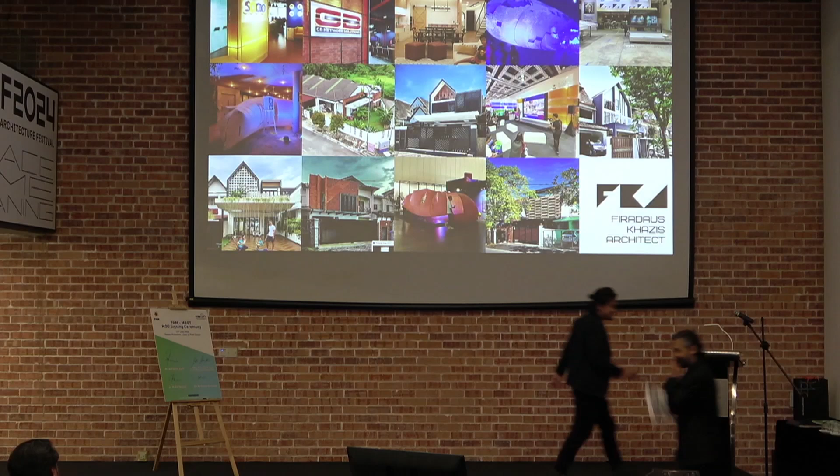Very good afternoon, my name is Firadaus Khazis. I'm the principal of Firadaus Khazis Architect. We are just a small firm. We established in 2019, and before COVID hit, we had a lot of small projects. Very rarely did we do big projects — all our big projects are on paper. Our small projects, fortunately, we got built, and we had a formula to make it happen.

But because today's topic is mostly about technologies, I'm going to focus on 3 of the projects we've done, purely based on parametric design. I'll divide the projects into 3 scales: small, medium, and big. Two of them we did under FKA, and one is a project I did when I was in university.

A little bit about myself — I'm from Taiping, Perak. I did my foundation in Taylor's, then my degree in the University of Melbourne. I came back to work for ZLG Design, then went back to Melbourne to finish my master's, did an exchange at the University of Stuttgart, worked for ZLG Design, ZSR Architecture Venture, and a little time at DTLM Architect before I established my own firm.

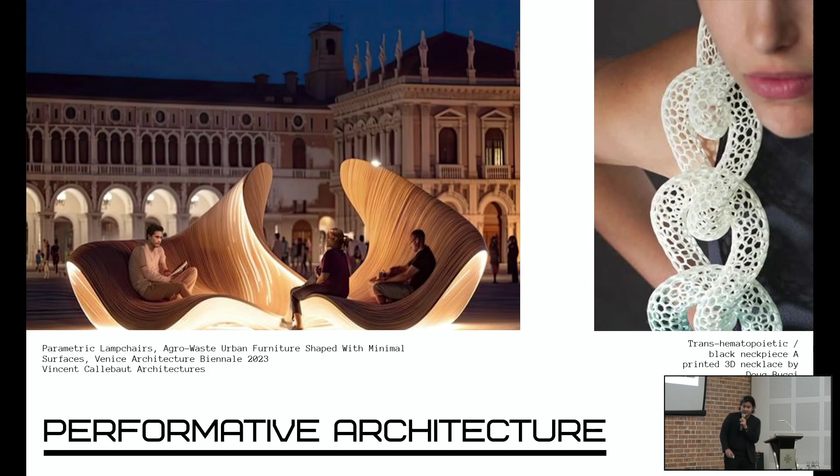Parametric, performative architecture is like a combination of parametric work. Some architects use it also for furniture design—I apologize because the image got cropped, I do not know why. And some designers use it for jewelry designs.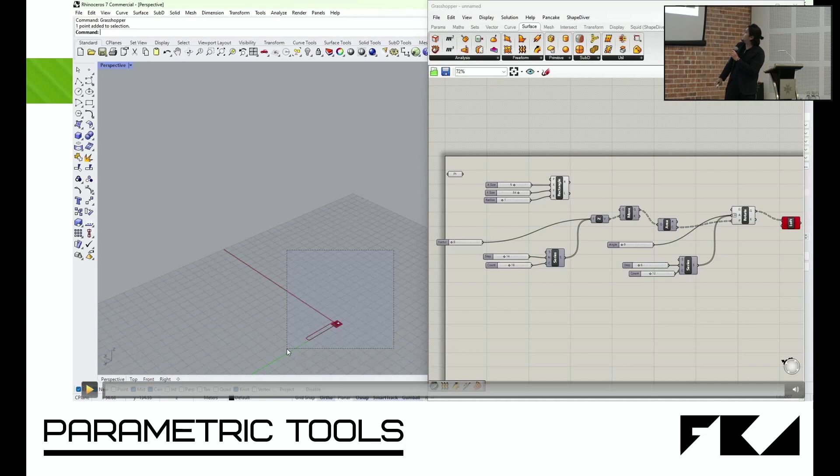The common design tools that we use for parametric design are Rhino and also Grasshopper. The other ones are Revit and Dynamo. For Rhino, okay—

It works the other way than conventional 3D. If you use conventional 3D like SketchUp, you get a real-time 3D software where you can build from zero. But for Grasshopper, the plugin of Rhino, what it does is you set up the parameter—that's why it's called parametric. For example, in real-time 3D software, you're not doing anything on it.

You just set one point for it, and then what you need to do is set the parameter. From one point, you assign what kind of shape you want—in this case, I assign it to be a rectangle. Then from there, I connect to another parameter to copy it, move it around, and rotate it. And it turns out like that.

Okay, so back in 2010, parametric design was not so common, it was a bit alien. I was in University of Melbourne, and at that time RMIT was a rival to Melbourne Uni. I finished my degree in 2010, and I asked my program coordinator whether there would be a parametric course during the master's program, and they said they were planning for it. Because of that, I took a year off just to work.

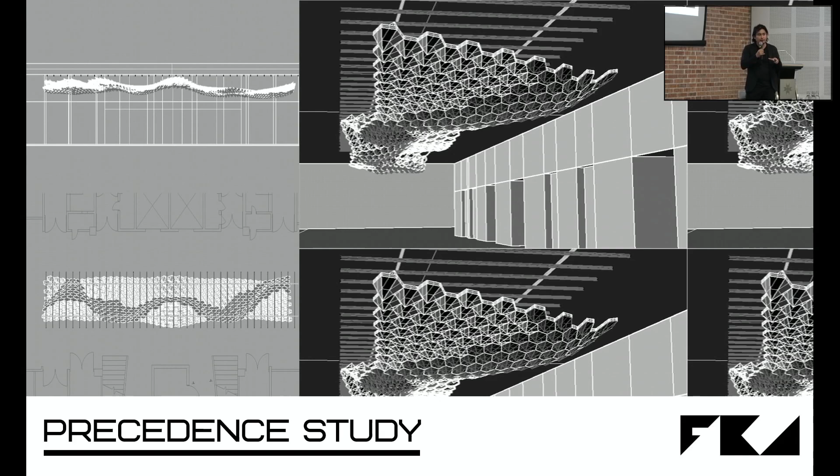So, a precedent study—this is the work from Skin Studio 1. What they had to do is use parametric software to design and decorate a ceiling at the architecture school lobby. So they did a lot of samples and iterations, and that's the final product.

Okay, so unlike a typical architecture studio, the students are required to work in groups of 15 people. Within 12 weeks, they need to design, explore the software, and build. So that needs to happen within 12 weeks.

So the next semester, which I applied for and couldn't get into, is also Skin Studio. Apologies for the image, there's only one image actually. So what happened at University of Melbourne is there was a steel staircase right in the middle of the atrium, and the assignment was to ask all the students in the Skin Studio to design a facade for the steel staircase.

So from there, what they did is they designed the facade. From the parametric software, they assigned a skin to the steel staircase, and then they subdivided it. From the subdivisions, they found points of interest where someone using the staircase would stop and look upon the atrium—there are multiple viewing points.

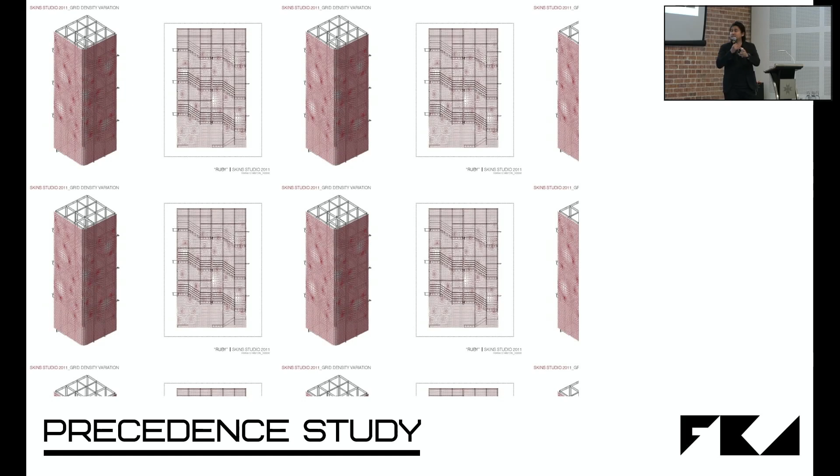So from the viewing points, the subdivisions, they control the size of the subdivisions, and that becomes the point where they will make bigger openings.

So these two studios, I was actually fortunate for not being selected for this studio, because what happened is the two Skin Studio, all the 15 students for each semester couldn't finish on time, so they needed to extend like a week or 2 weeks, so they couldn't get results on time. So when it came to my time, where I got into Performative Architecture Studio in 2011, Melbourne University announced that they're going to tear down the old buildings. So we were thinking that because this studio is about contributing back to Melbourne University, to the building, but if they are tearing it down, it means all the effort will be gone.

So those who were selected, we thought about creating a brief where the brief is to design an installation that is portable and can be carried to different event spaces. The design must be able to be fabricated within a month. We were warned by the program coordinator that Parametric Studio always causes delays in the university issuing out results. So we were only given 1 month to make the production, and then we needed to make it portable, because once the building is torn down, we don't want it to be washed away with the building.

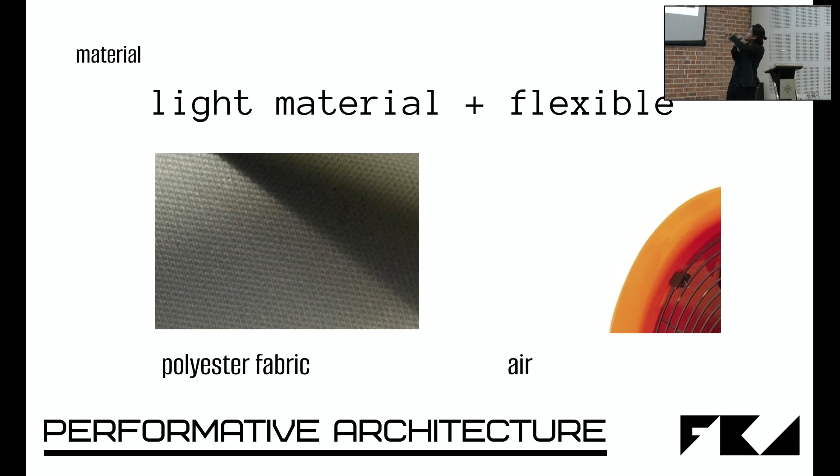So we thought about material first before we started designing. The material needed to be light and flexible. After brainstorming, we came to 2 materials, which is polyester fabric and air. There's a picture of a fan there, got cropped. So those are the 2 materials that we were going to use for this installation.

So last year, in October or September, I got invited to participate in installations at Museum Telecom. It's under Kuala Lumpur Design Festival. That's Museum Telecom, and the brief was to build a 3 meter by 3 meter installation. The one I did before during my uni years was like 40 feet by 40 feet, 12 meter by 12 meter, so I needed to shrink it down to 3 meter by 3 meter. And the same thought I had was that it needed to be portable and flexible.

So the first thing I did, because it's going to be parametric, was set up the skeleton of the structure. Then from there, using the function loft, L-O-F-T, to connect all the skeletons and create a surface. From there, we start to subdivide it, and we make a decision on which parts we want to be solid and which parts are going to be transparent.

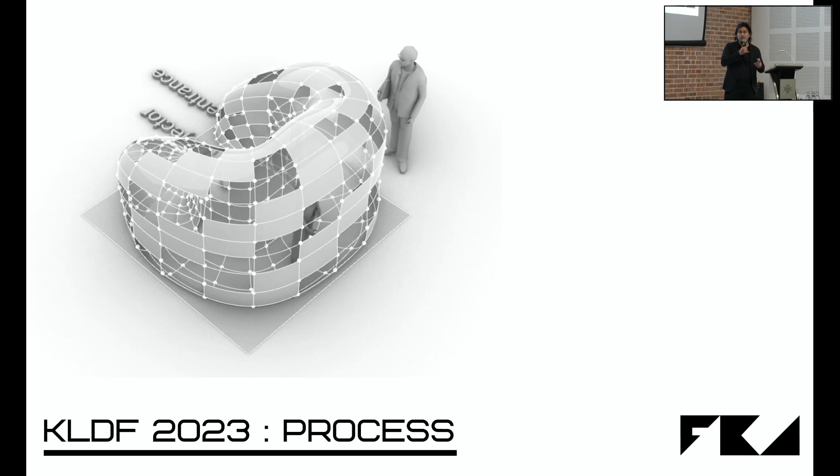So we thought about the entrance as well. And then when it came to fabrication, we started to think about how we couldn't make a lot of subdivisions. If you see this one, each of the dots that creates the rectangle is actually one subdivision, which means you need to do a lot of stitching for it. So we simplified the subdivisions.

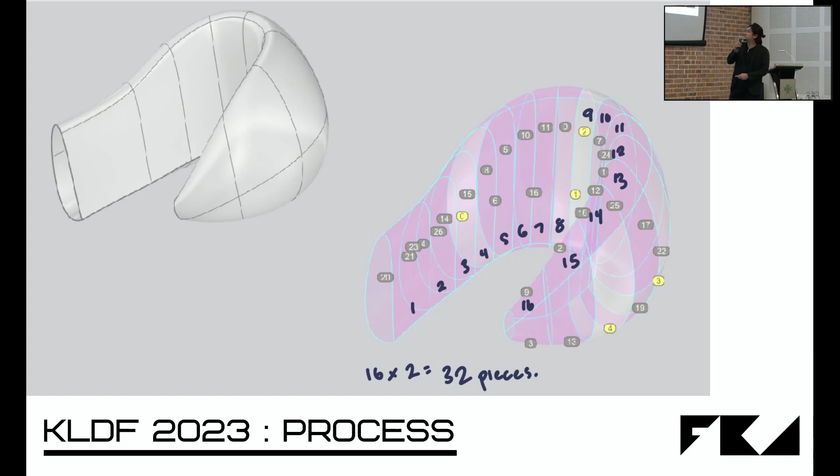We simplified it down until we only needed 32 pieces to stitch, because we only had a month for production.

The good thing about parametric design is once you design the parametric form in the software, you can unroll it and then print it for fabrication. In this case it seems like there's no limit for us to do anything we want, but actually there are limits.

The limits are the size constraints, because we are printing it on our office plotter. The size of the office plotter maximum can go up to 1.1 meters by 3 meters. So we have to keep all the subdivisions, or the parts, within that size before we print it.

Another problem we had is the canvas size. The fabric that we bought, the width is 1 meter, but it goes up to 35 meters in length. So from left to right we had to keep it within 1 meter, and the total length was 3 meters.

We started to print out and do mock-ups, because what happened is it's so hard to find fabricators that can do it within a month.

And we were lucky because we talked to Jekyll. We bought the fabric from Jekyll, and Jekyll said that okay, he had workers that could help us. And then the problem we had is the workers didn't speak Malay at all.

So we were thinking, okay, we only have 2 weeks left at that point in time. What we did is we printed it out in smaller scale, and joined up to explain how the fabrication was going to be. That's the size of the fabric, that's the fabric production, and we managed to deliver it on time.

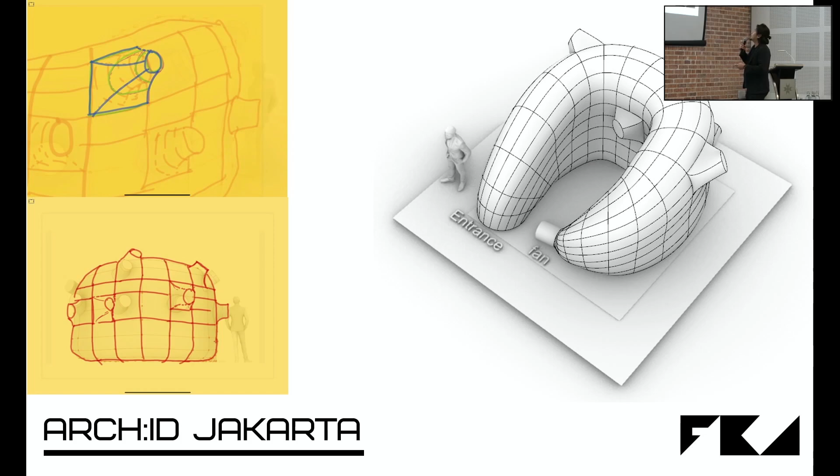So the design for this one, what we're trying is to add window openings looking like tentacles. But towards the end, we decided to move all the windows to one side. And again, a mock-up. Can I have the play video?

This time around, because the size is big, we can make 4 divisions in the y-axis and 20 divisions in the x-axis. But we are still limited by 1 meter by 3 meter because of the plotter size.

So these are the workers — they don't speak Malay. I was lucky that during this time I had an intern from Tanzania, so he helped me communicate with them so we could do more crazy shapes. The production took us about 2 weeks.

Once completed, we tried it out in our office and found that it's a bit too lame, I would say, because the fabric we got is polyester fabric. The colors are a bit yellowish, not pure white.

So we thought about giving it dye colors. We did experiments with 2 color combinations — one orange to red combined together, the other purple to red — and then we decided to go with orange and red. That's the process of dyeing in the office.

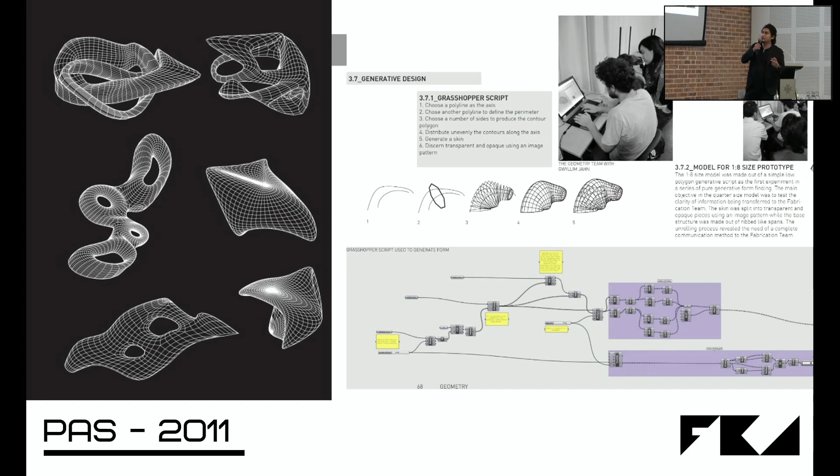And then we also do visual mapping. So the idea about this installation is we want people to feel like they are in a forest where they can see a bit outside, a bit of sunshine, when they stand under the trees.

And then we start to unroll it, and this was the form. You can see that three forms are about the same because I was the lead designer for this one, so I used that for the other two, which is the KLDF and also ArchID. But this one is double the size of the one that we had at ground floor today.

So we have alternating plastic PVC and also fabric. At the same time, what we needed to do was the scripting, so we wrote a JavaScript script, and we project it onto the installations.

We can play the video. On the left is the JavaScript. All 15 of us needed to master JavaScript. What it does is we need to create agents, and for the agents we have to set behavior and parameters. The parameters are whether they want to repel among themselves or whether they want to move together, and also the speed.

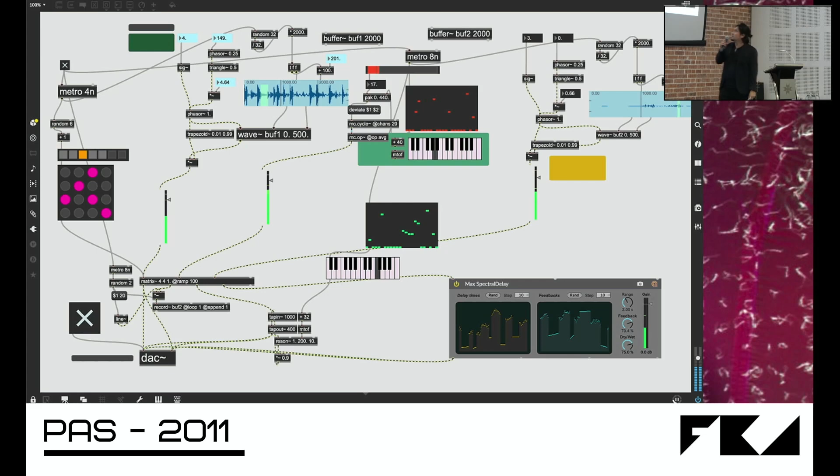We also had to learn a software called Cycling 74. What Cycling 74 does is connect all the equipment together. I think a lot of nightclubs use this software — it arranges your lighting, your sound speakers, and coordinates everything with the DJs. So this is the software, and we had to learn it.

This software is also the one that connects to the sensor. That's our sensor, and the sensor connects to our computer, and the computer tells whether someone is coming nearby to the sensor. And then you can see that is the lantern.

When we delivered the project, we found that the sensor doesn't work well in the dark. So what we needed to do was create a lantern — a light that we carry through. When the lantern is carried near the sensor, the agent gets agitated, so that agent moves around because the sensor is nearby.

So when the lantern sits in the middle, all the agents become activated.

One thing about the two installations I did before, the KLDF and ArchID — I couldn't get the same material as we did in 2011. That's what's lacking in Malaysia; it's very hard to get material, especially fabric. Like this one here, we could easily get it off the shelf. Here are some views of the installation. So that's the 11 of us that delivered the work.